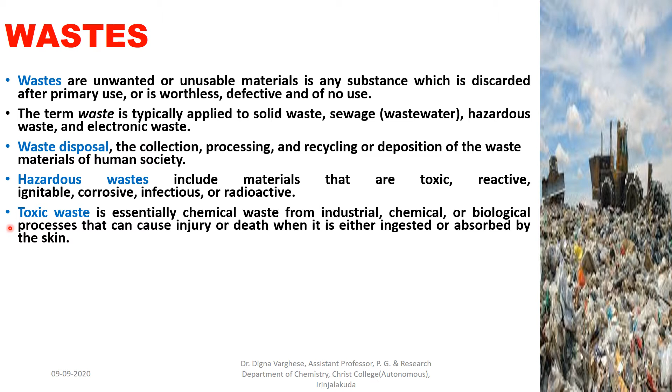Hazardous waste include the materials that are toxic, reactive, ignitable, corrosive, infectious, or radioactive. Toxic waste is essentially the chemical waste from industries, chemical or biological processes that can cause injury or death when it is either ingested or absorbed by the skin. Reactive wastes are chemically unstable and react violently or explosively with air or water.

Infectious wastes are those waste materials that may contain pathogens. These wastes are obtained from used bandages, hypodermic needles, and other materials from the medical and research facilities.

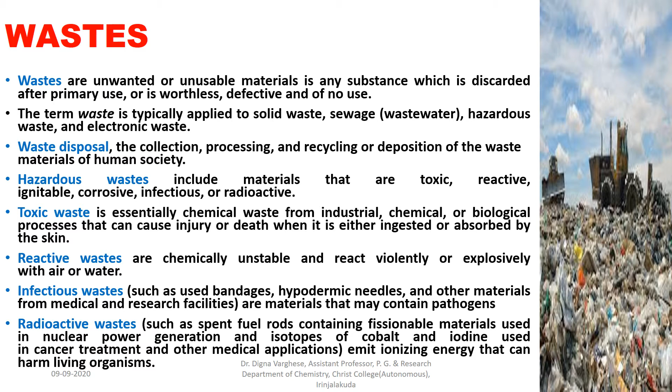And the radioactive waste emits ionizing energy that can harm the living organisms, that is present or obtained from the nuclear power generation, and also from the medical applications such as for the cancer treatment, cobalt and iodine isotopes are used. So these are some important terms used in the solid waste management.

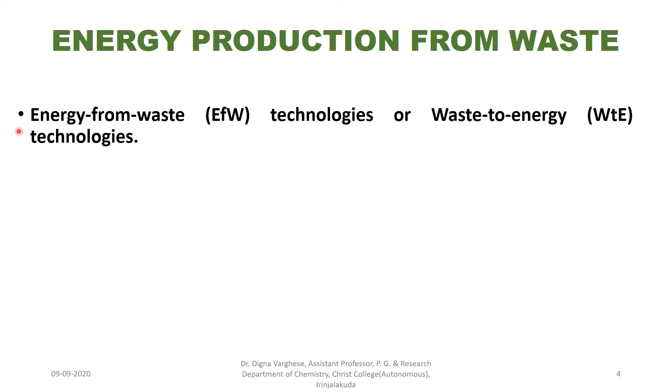Energy production from waste. Energy from waste technologies or waste to energy technologies, that is similar. Waste that cannot be recycled can be utilized through biological treatment to create biogas, or through the thermal treatment to produce fuel gases or flue gases, the chemical energy of which can then be converted to electricity and heat energy.

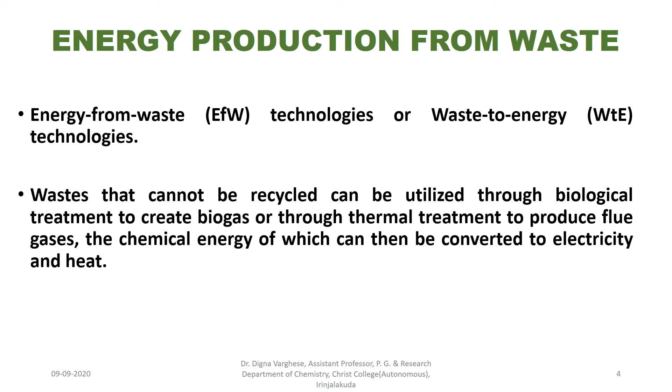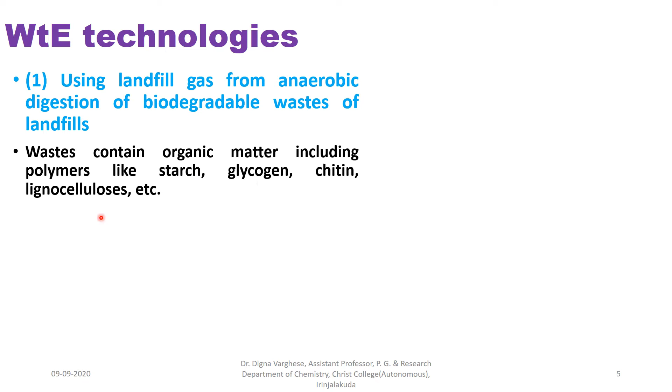Waste to energy technologies or energy from waste technologies. First one is using landfill gas from anaerobic digestion of biodegradable waste of landfills. We know the waste containing organic matter including polymers like starch, glycogen, chitin, and lignocellulose, etc. These can be degraded by the enzymes or the microorganisms present in the land. The major products are methane and carbon dioxide.

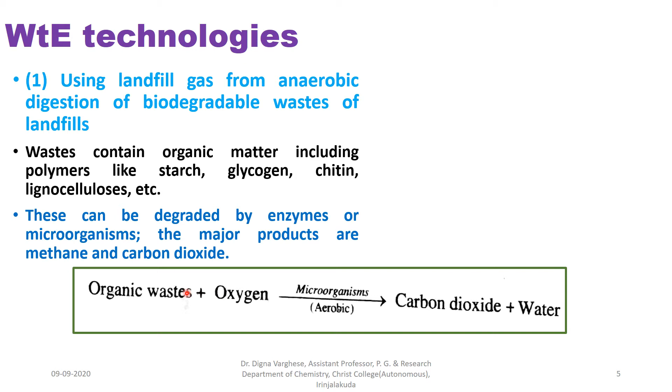First, the organic waste present on the upper part. If oxygen is there, the aerobic microorganisms degrade the organic waste into carbon dioxide and water, and in the absence of oxygen, the organic waste is degraded by the anaerobic microorganisms that will convert the organic waste into methane, carbon dioxide, and water.

In the deeper part of a landfill, the waste goes through anaerobic digestion, and 40 to 70% methane gas is obtained. The methane present in the landfill gas is a source of energy. Its combustion energy can be used in boilers to generate steam, which can then be used to drive the turbine generator that will produce electricity.

So here from the waste we can generate electrical energy and also the heat energy, which is used in boilers to generate steam, and this steam can be used to drive a turbine generator that will produce electricity.

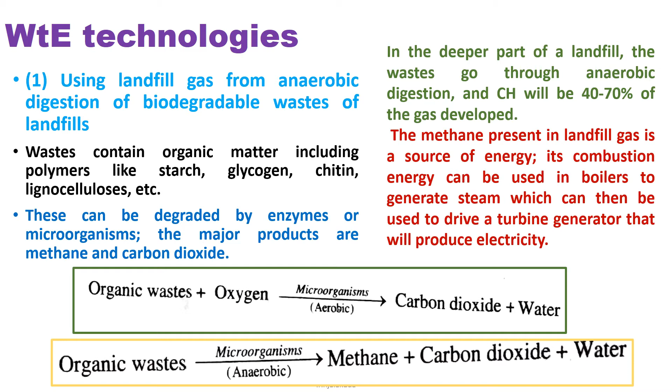Biogas from anaerobic digestion of biodegradable waste in a digester. That is the second method. Here, in a human engineered decomposing system called an anaerobic digester, that we already discussed in a biogas plant, the organic biodegradable waste can be made to undergo decomposition, generating biogas which contains 40 to 70% of methane.

Anaerobic digestion of biodegradable organic waste uses methane producing bacteria and an oxygen free environment to degrade the waste under controlled conditions of temperature, moisture and pH, etc. Here the organic waste at anaerobic condition, in the presence of anaerobic microorganisms, is converted into methane, carbon dioxide and water.

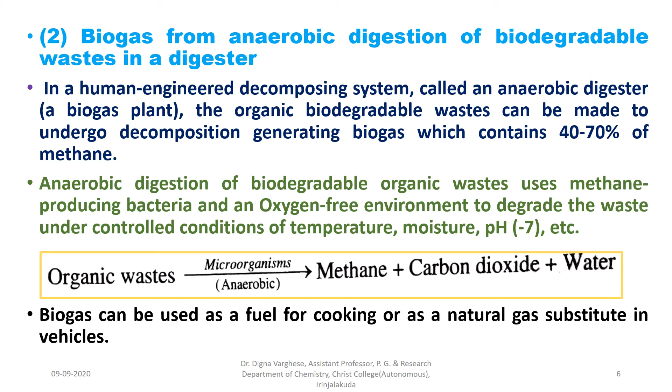This biogas, that is methane, can be used as a fuel for cooking or as a natural gas substitute in vehicles. That is actually from the biogasification. Methods available to convert biogas into electricity.

That is, use biogas as a fuel to produce pressurized steam from water and then use the steam to power a turbine generator in order to produce electricity. Here is an anaerobic digester, to which organic waste is disposed, so that here we will get biogas by the action of anaerobic microorganisms that will produce pressurized steam from water, and then use this steam from the boiler to power a turbine generator which will produce electrical energy.

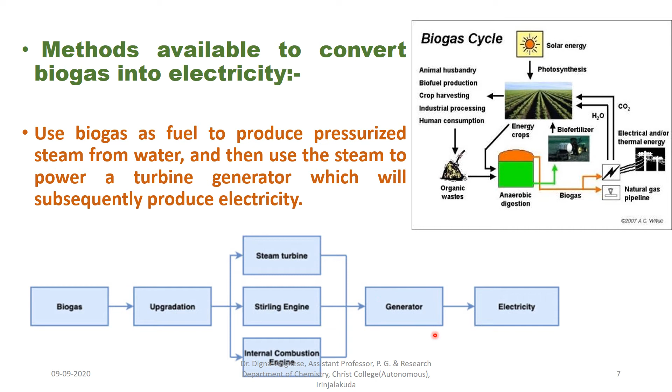That is biogas. On upgradation, it will be converted to power a steam turbine, that is a turbine generator, or a Stirling engine or internal combustion engine, to power a turbine generator that will produce electricity.

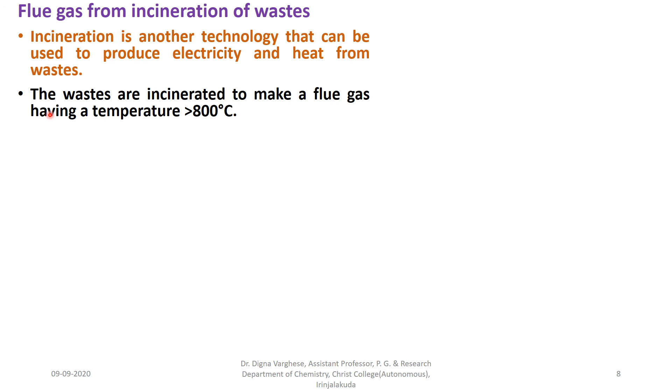Another one is flue gas from incineration of waste. Incineration is another technology that can be used to produce electricity and heat from waste. The waste is incinerated to make a flue gas having a temperature greater than 800 degrees Celsius. That is, waste in the presence of air is put into the incinerator at a high temperature, in between 900 to 1000 degrees Celsius or more. We can say greater than 800 degrees Celsius, and we will get flue gas.

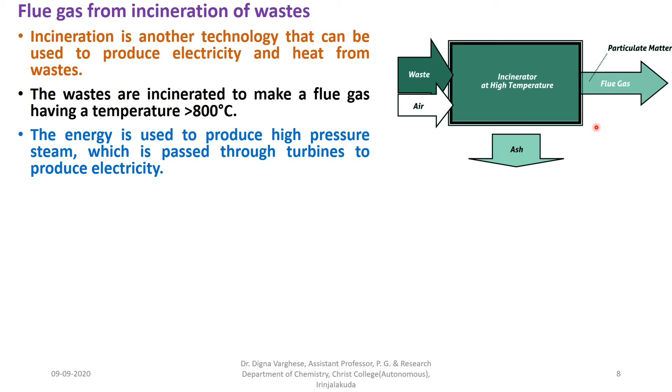The energy is used to produce high pressure steam which is passed through the turbines to produce electricity. Here we can see a flow diagram: waste is put into the incinerator and undergoes incineration at a temperature higher than 800 degrees Celsius. It will give heat energy, flue gas and ash, and from this flue gas we will get high pressurized steam that will pass through steam turbines. From that we will get electricity.

We are using the high pressurized steam. If any unused low pressure steam is here, it can be used to heat up the water. The warmed water can then be supplied to households or used to heat up houses during winter in foreign countries. So here, any high pressurized steam is used to work the steam turbines in order to generate electricity. Any low pressure steam is used to heat up the water or to heat up the houses during winter.

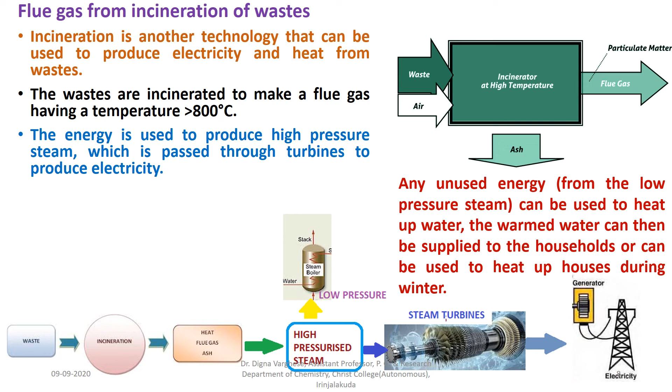And the remaining organic waste is converted to ash. That ash can be disposed of in any landfill.

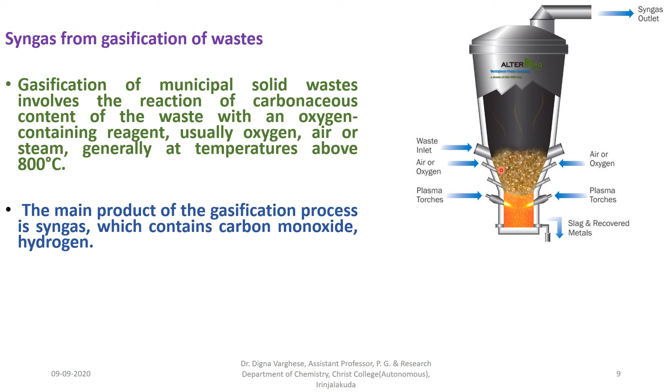Syngas from gasification of waste. Gasification of municipal solid waste involves the reaction of the carbonaceous content of the waste, that is the organic matter of the waste, with an oxygen containing reagent, usually oxygen or air or steam, which acts as the source of oxygen, generally at temperatures above 800 degrees Celsius. From that we will get syngas. The main product of the gasification process of organic waste is syngas, which contains mainly carbon monoxide and hydrogen.

Syngas can be burnt in a boiler to generate steam. This steam can be used to drive the turbine for power generation. That means by driving the turbine we will get electricity, and this fuel can also be used in a gas engine.